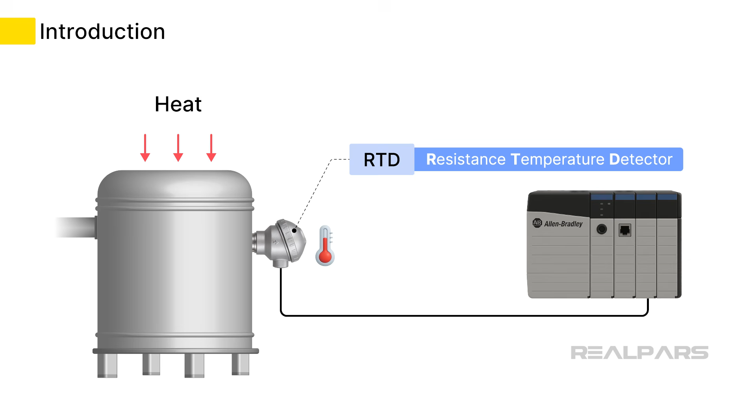It's challenging to find an industry that doesn't incorporate temperature measurement, as almost every chemical or physical process depends on controlling heat. The resistance temperature detector, or RTD, is a rugged and versatile sensor used to detect temperature. In this video, we will begin with a brief overview of how an RTD works, its designation, and why it often has more than two leads.

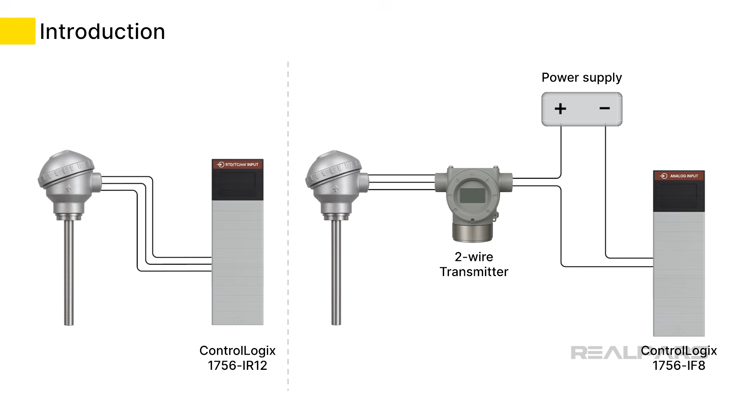We'll introduce you to the two methods of integrating an RTD with a PLC analog input and explain the pros and cons of each. We will take you through a step-by-step demonstration of how to configure an RTD with a two-wire transmitter connected to a ControlLogix 1756 IF8 analog input module using Studio 5000.

To make this demonstration easier to understand, we will use a ControlLogix simulation program to create analog input values. Finally, we will demonstrate how to utilize the 1756 IF8 module's scaled values in Ladder Logic to activate an alarm at a specific temperature. Okay, let's start with a bit of background on the RTD.

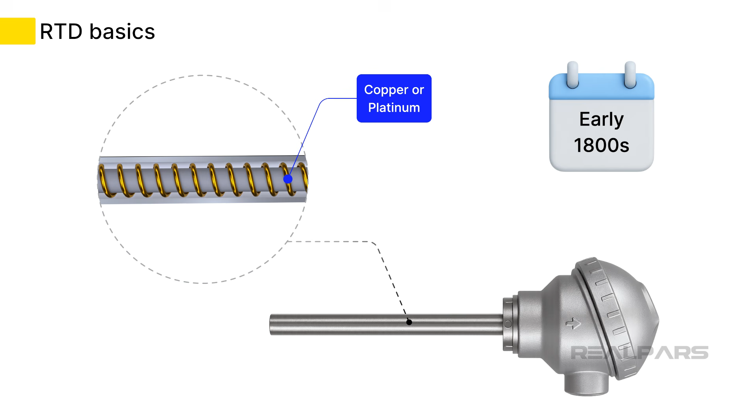The RTD is a simple device. In the early 1800s, scientists discovered that the resistance of metals, like copper and platinum, changes with temperature, making them ideal for precise temperature measurements. In the 1980s, the Pt100 RTD was standardized as an industrial RTD and remains the most widely used in process control today. Let's break down the designation Pt100.

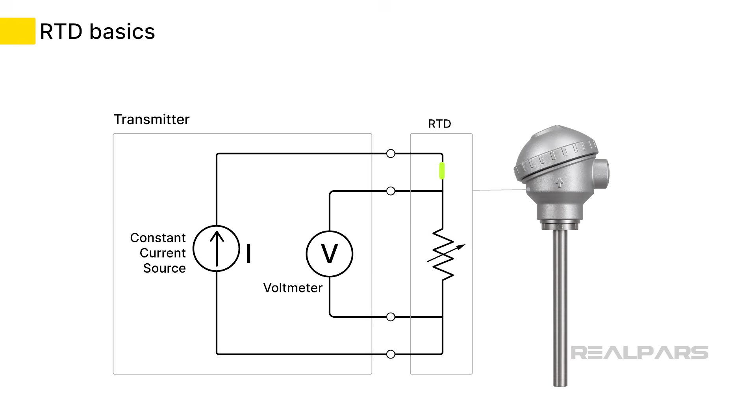Pt is platinum, and 100 is the RTD's ohm value at 0 degrees centigrade. To determine the measurement temperature, the RTD is excited by either a voltage or a current source. Most RTDs used in process control have 3 or 4 wires to compensate for the length of the leads.

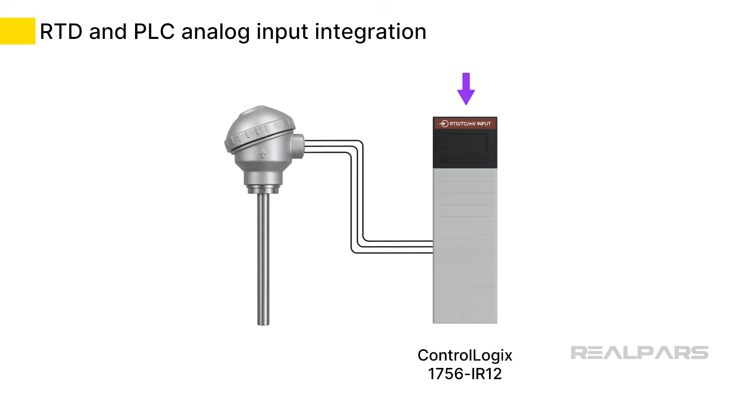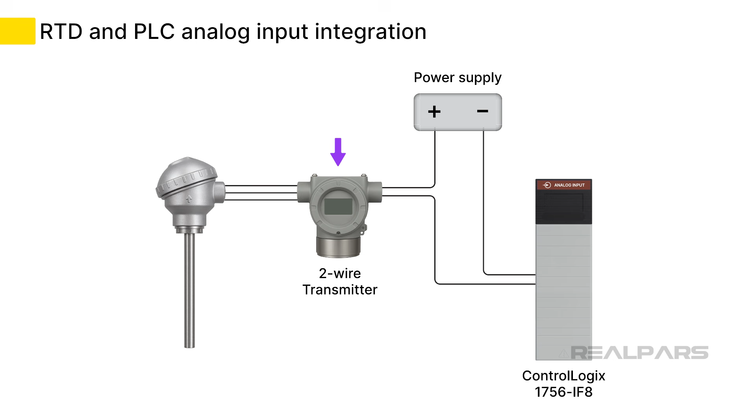There are two methods of integrating an RTD with a PLC analog input. The first method utilizes an application-specific analog input module, such as the AB 1756 IR12. This module connects directly to the RTD under test. The second method utilizes a two-wire 4 to 20 mA temperature transmitter connected to a generic analog input module, such as the AB 1756 IF8. Both methods ultimately provide an accurate scaled temperature reading inside the PLC.

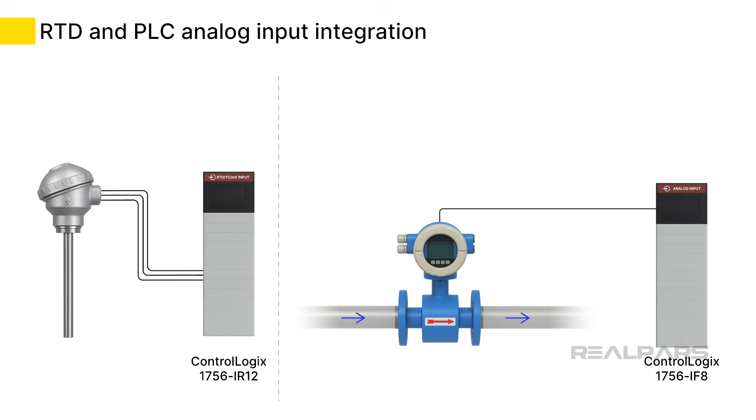Of course, there are pros and cons to each. You are more likely to find RTDs connected directly to an input module if the RTD is close to the PLC and the wiring is short. Using a 4 to 20 mA transmitter provides a more flexible environment, as the receiving input module can be used in other control loops as well. That is the last time you will hear about the direct-to-PLC input module method, as we are going to do a deep dive into configuring an RTD with a two-wire transmitter connected to a ControlLogix 1756 IF8 analog input module.

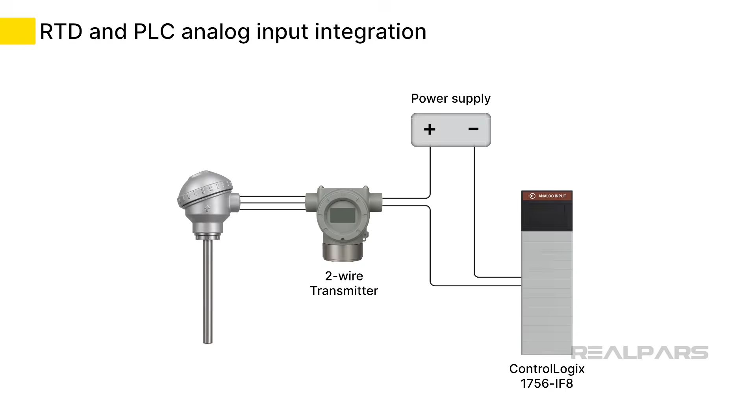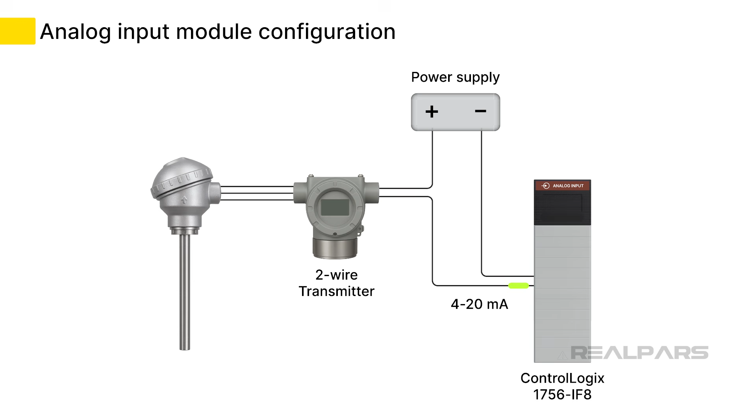We'll start with a typical setup, featuring a 3-wire Pt100 RTD connected to a 2-wire transmitter that is providing a 4 to 20 mA process variable signal to an AB 1756 IF8 analog input module. We've already performed I/O module configuration in the ControlLogix simulation program. We have 9 slots in our virtual PLC. We will simulate the transmitter connected to the AB 1756 IF8 module in slot 7, channel 1.

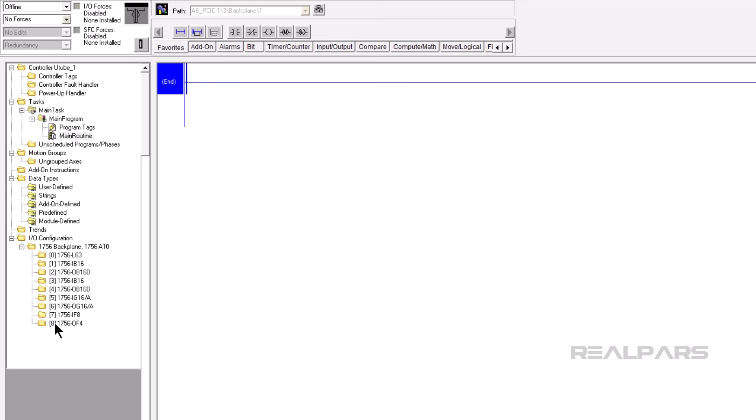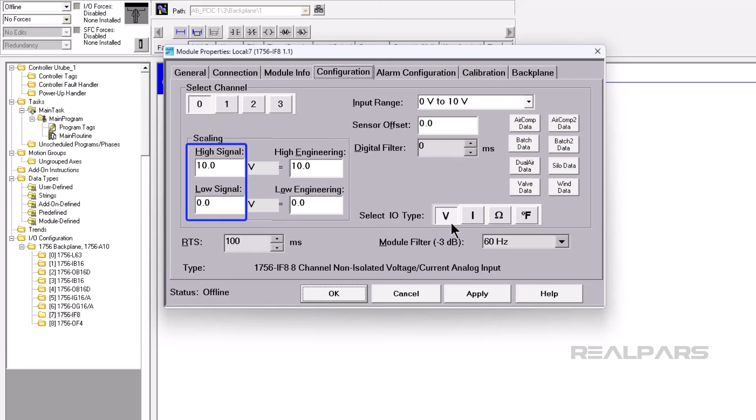Opening the configuration properties for this module shows 4 channels to choose from. Each channel is capable of receiving a voltage or current input range. The views differ in RSLogix 5000 and Studio 5000 from those in our simulation software. We're going to focus on the scaling section. That's where we will scale the input signal from the temperature transmitter into values we can use in our PLC Ladder Logic program.

Let's write a simple routine to move the data from the analog input module in slot 7, channel 1. Remember, our 4 to 20 milliamp transmitter is connected to this module. We start by placing a move instruction on rung 0.

The move instruction source will be the data from the analog input module. We'll create a new base tag called temperature for the destination. We select real as the data type, and we will name it temperature.

Next, we will assign Local:7:I.Ch1Data from the drop-down list as the move source. This is the data from our temperature transmitter. And now we assign temperature as the move instruction destination.

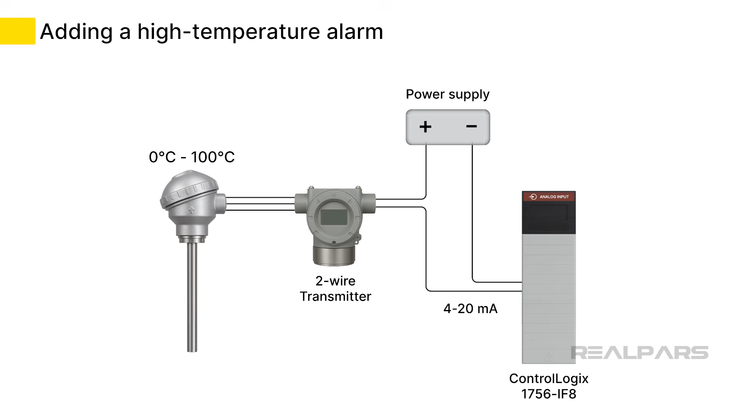Let's assume our process variable temperature range is 0 to 100 degrees centigrade. Our transmitter output range of 4 to 20 milliamps therefore corresponds to a temperature range of 0 to 100 degrees centigrade. Okay, now let's go back to the 1756-IF8 properties and configure the scaling to accurately represent our process variable temperature range. Choose channel 1 and an input range of 4 to 20 milliamps.

The high signal and low signal values are directly related to the input signal. In our case, our high signal is 20 milliamps, and our low signal is 4 milliamps. High and low engineering have no units until you decide. You can call them bananas if you like. We will use degrees centigrade as our units. We set the high engineering value to 100, and the low engineering value to 0.

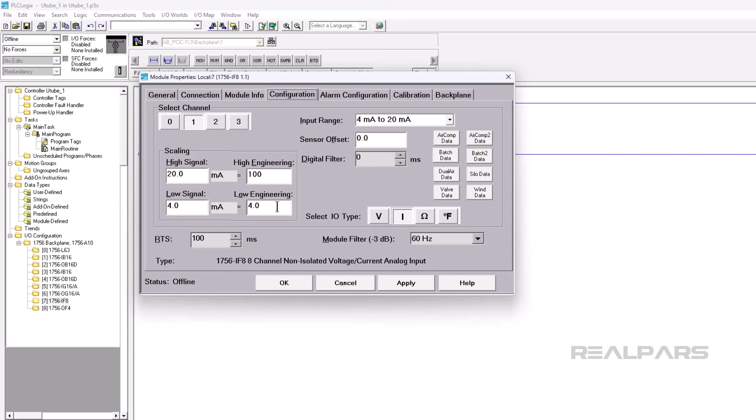Let's run the ladder logic routine and simulate the temperature using the built-in simulator. The move instruction source and destination values change between 0 and 100 as we adjust the slot 7 channel 1 slider for current values ranging from 4 to 20 milliamps. Setting the input value to 12 milliamps produces a corresponding destination value of 50, which translates to a temperature of 50 degrees Celsius. It's that simple.

Let's change the temperature range to 40 degrees Celsius to 140 degrees Celsius. All we have to do is change the high engineering scaling value to 140 and the low engineering value to 40. This time, the move destination value representing temperature changes from 40 to 140 as we change the current slider from 4 to 20 milliamps.

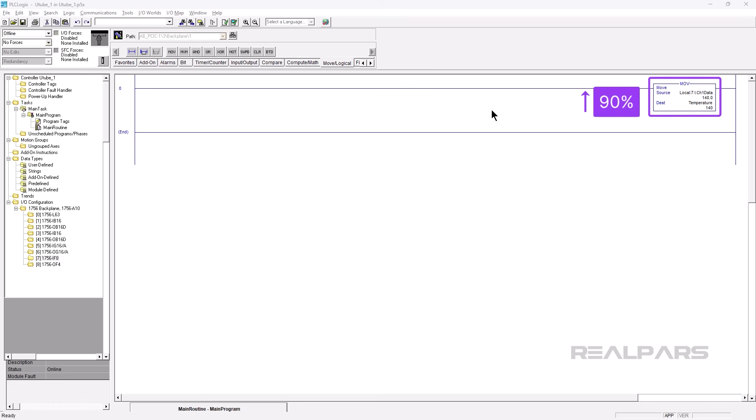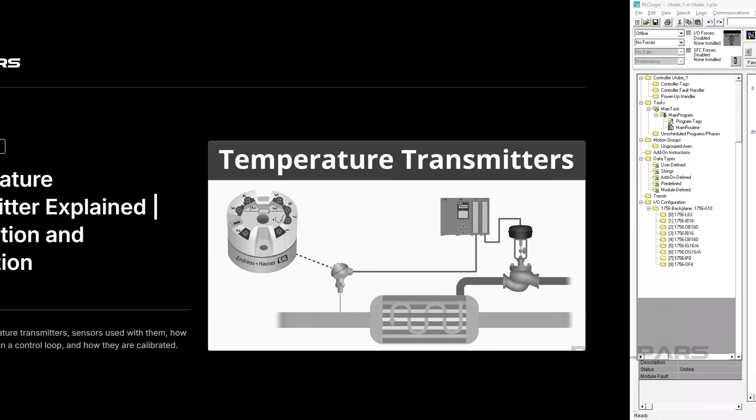There are many things we can do with this temperature value. Let's add another ladder rung and code to trigger a high temperature alarm if the temperature exceeds 90%. Performing a few math calculations, we find that the 90% point between 40 degrees Celsius and 140 degrees Celsius is 130 degrees Celsius. If you are fuzzy on how we got the 90% temperature value, we recommend watching the video Temperature Transmitter Explained, Connection and Calibration.

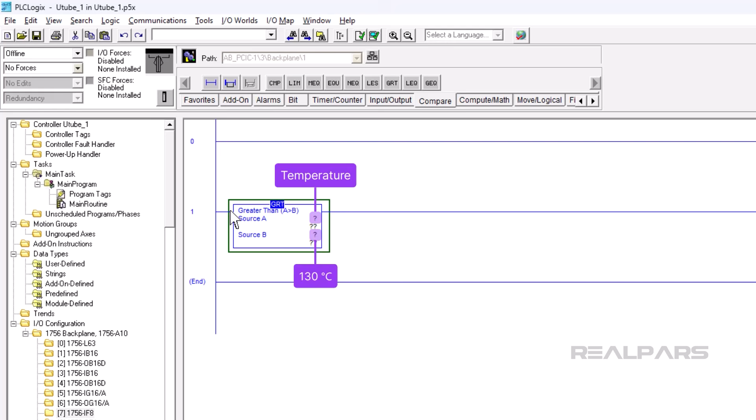We add another rung and insert the GRT compare instruction. We'll use this instruction to compare the temperature with our alarm point of 130 degrees Celsius. An OTE is added to activate our alarm. We choose temperature from the drop-down list as source A. For source B, we enter 130.

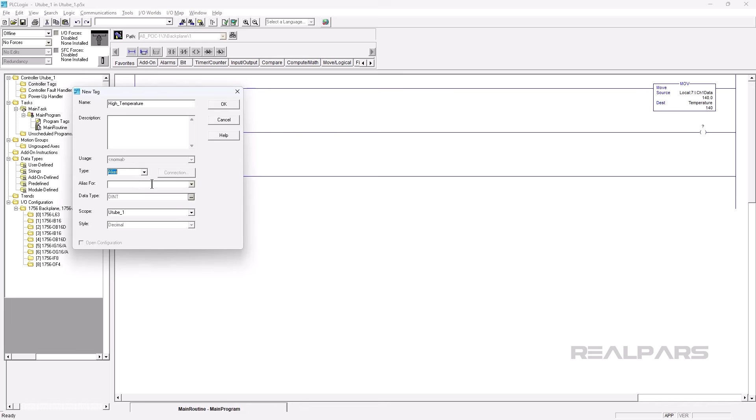Our simulator has a digital output module in slot 2. We will use one of the outputs for our alarm. Next, we create a new controller alias tag called high_temperature. This is a bool alias to the digital output card in slot 2, output 0. And finally, we address the high temperature OTE as Local:2:O.Data.0 from the drop-down menu.

Okay, let's try it. If our current input slider exceeds 90% or 130 degrees Celsius, the OTE goes true, and the lamp connected to slot 2 output 0 turns on.

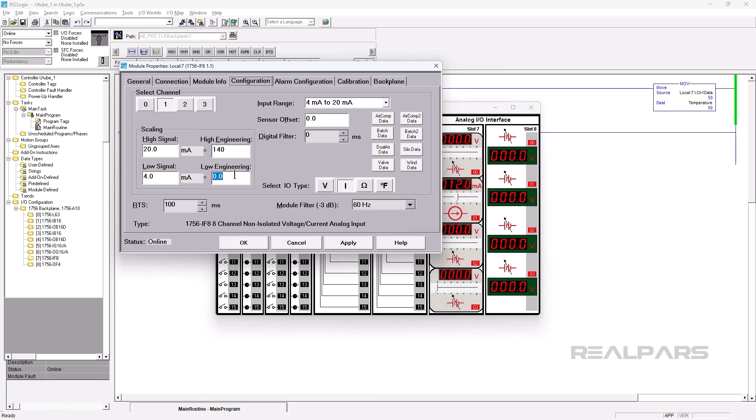Okay, that's it for this video. We hope we've convinced you that, with some basic scaling, an RTD signal can be translated into ladder logic that you can use for accurate temperature monitoring and control.